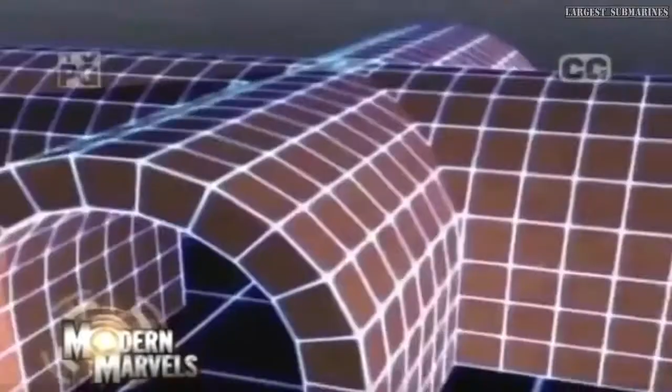A simple shape, a span across space and time, and the single most influential form in Western civilization, perfected by the ancient Romans. It spans great rivers, takes us deep into the sea, and will enable us to live on other worlds. It's the basic building block in human history, finding its way into millions of structures for millennia. Now, the Arch, on Modern Marvels.

The Arch. In its many forms, this uniquely adaptable and robust shape has dominated the Western world since its invention over 2,000 years ago. Its characteristics: able to span long stretches, carry incredible loads, and withstand the ravages of time, all while being composed of the simplest materials, make it the most enduring building form known to man.

The idea behind an arch is that it channels the force that the structure needs to support in a way that is most efficient in terms of the way it uses the material. No other shape comes close to the arch and its relatives, the vault, cylinder, and dome, for efficiency. But there was a time when such structures were unknown.

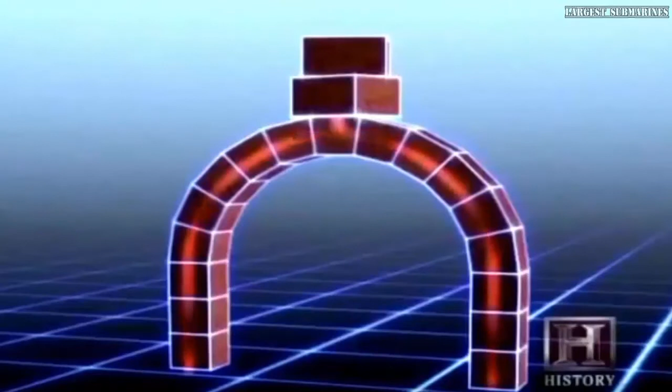As we move supports around, the arch can adjust to these different movements and can adapt with new internal forces. And the key really, or the magic, is that they can carry so many different possible loadings. And as the ground moves, the arch quite happily adjusts to it. It's in equilibrium, it stands. We can find a line of forces through one. As long as the line of force is contained inside the structure of the arch, or terminates at the arch supports, it can stand practically forever. But if the line of force moves outside the arch because of increased loads or changes in shape, it will fail.

The Romans understood this. It's a tribute to the fact that the Roman engineers knew about how their structures could redistribute forces even after they become damaged.

Arches come in all sizes, shapes, and styles. The classic Romanesque arch is a semicircle, built of stone or concrete. The Gothic arch from the 12th to 15th centuries has a pointed crown, allowing for more open spaces. Other arches include the basket handle arch, popular in Britain, which allowed a very broad opening.

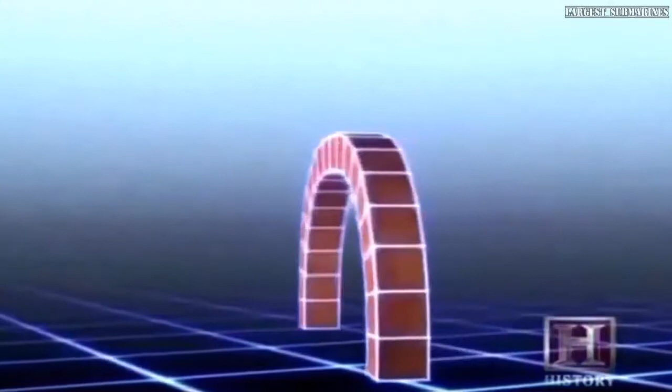And in the East, overextended or Moorish arches appeared, with less structurally sound but unique-looking forms. Although an arch's primary purpose is to support a load, its shape invited artistic innovations. As arch design progressed, the use of stone became a highly refined craft. The placement of stones, and especially the keystone, became a personal statement of the designer.

A keystone is the last stone placed in a traditional arch. It's the stone that locks the arch into place. Keystones were traditionally made larger and more important looking than the other voussoirs or arch stones. But surprisingly, this was largely a cosmetic choice.

You hear a lot of talk about the keystone in an arch being this most critical piece, this most special piece. The keystone has the smallest amount of force, yet it gets all of this attention. It's kind of a paradox. You'd expect to have more force at the middle, but the smallest force is at the middle. And therefore, a keystone does not actually carry very much force.

If you have an odd number of voussoirs, they're called the pieces of an arch, then there is an odd one in the middle, which is the keystone. If, however, you make the arch out of an even number, then there is no keystone. But being the last stone in the arch, the keystone does have one very special purpose. Without it, the arch will fall down.

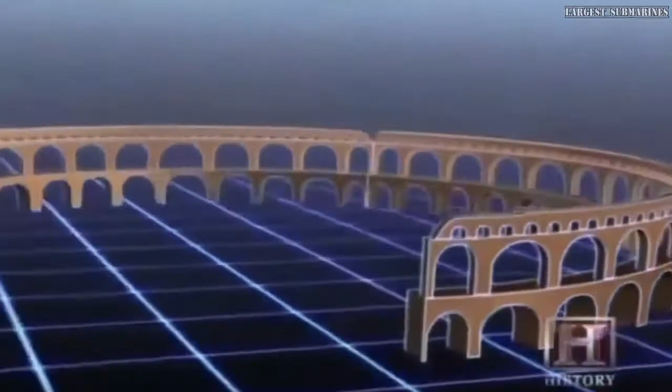These astounding structures were a stunning testament to the ingenuity of their designers. But there was much more to come from the basic design of the aqueduct. I think of the Colosseum kind of as a Roman aqueduct that's folded onto itself to enclose space. It was the arena of the emperor and the citizens of Rome.

Over 600 feet across at its widest point and 160 feet high, the Colosseum was home to myriad events. It allowed up to 75,000 spectators to watch great gladiatorial battles in architectural splendor. The use of concrete is perhaps the most exciting aspect of Roman building technology.

The arch is a structural form. It would work with concrete or it would work with rock or masonry, but the Romans took the arch to another level. The Roman invention and use of concrete for construction led to the development of another use of the arch, the barrel vault. So instead of a single arch now, you have a room with a series of arches, and so that's three-dimensional, it's a vault.

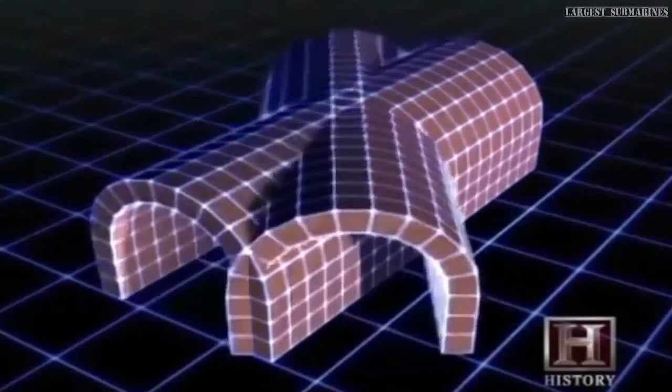But the Romans went way beyond that. They also took arches and they turned some arches 90 degrees to the first and made intersecting arches. So it's as if you took two barrel vaults and intersected them, and in the middle you have a big open area that's a groin vault. That's a clear Roman innovation.

Impressive though it is, the Colosseum was just a precursor for more remarkable structures to come. Just across Rome, the Pantheon was built in 125 AD. This innovative building would set the standard for centuries to come.

One sees structures like the Pantheon, and the most shocking, breathtaking aspect of walking into a structure like that is open space. What domes afford is interior space unencumbered by column support. The columns, of course, or the walls are on the periphery of the dome, and they're transmitting all the compression force from the dome down through the walls into the foundation.

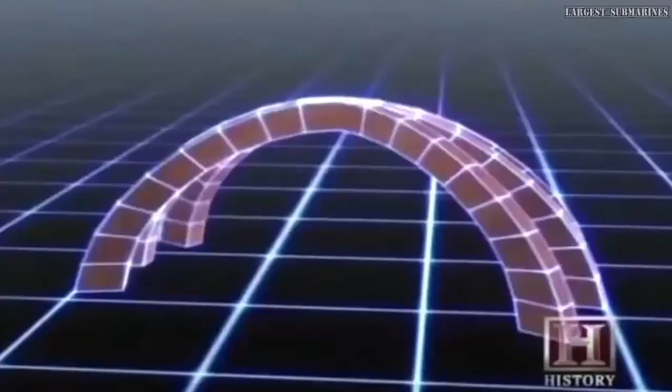The roof of the Pantheon was the world's first large dome. It was an unprecedented accomplishment. You could think of a dome as a series of arches that are all leaning on each other in the middle. But in addition to that, a dome acts as a series of hoops that surround the dome. So what prevents the dome from falling inward, there are arches in plan that are really circles that also can carry load in each ring of the dome as you build up.

The Pantheon has a traditional temple entrance, which opens to the great dome-covered interior. But there's a surprise once inside. In the exact center of the dome, there's a hole that brings in light. So you have all of these arches that are leaning together to form the dome. And exactly at the center, where they all want to lean together, Roman engineers take away the material and build a hole in the middle of the dome.

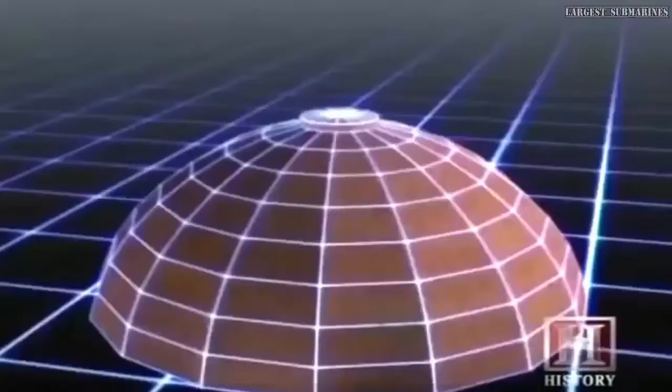The 30-foot wide hole in the dome center, called an oculus, is a huge compression ring made of stone, which in effect is a series of arches forming a circle. The horizontal forces of the dome, which keep the structure stable, converge at the top. It was a daring move by the Roman engineers. The Pantheon was an amazing achievement. But after the fall of Rome, builders would find other spectacular uses for the arch.

The Colosseum originally had 80 arches in each exterior level, totaling 240 arches above ground alone. The arch will return on Modern Marvels.

By 476 AD, the Roman Empire had fallen. Later, medieval church builders would take up the use of the arch, building primarily with stone. Concrete would not reappear for almost 1,300 years. But the designers of the Gothic era used the arch in ways the Romans could have only dreamed.

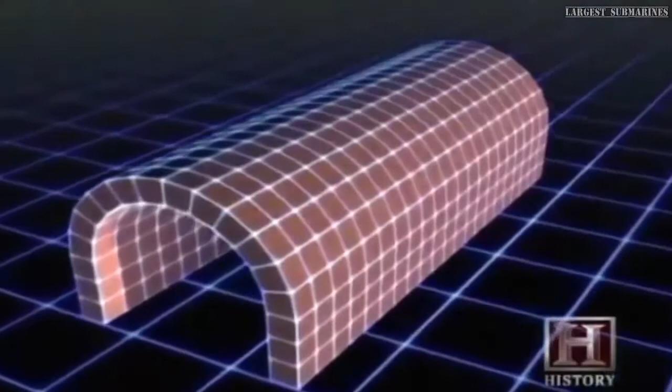The biggest advancement during the Gothic era was the getting away from the barrel-type vault and using more of an elliptical arch or a pointed arch. So from a visual perspective, it allowed the arch to be much taller. And the goal of the master builders during the Gothic era was to try to bring in as much light to the interior of the cathedrals as they could. So the taller they could make the arches relative to the width, they were able to introduce far more area of window.

The era of the Gothic cathedral also saw the use of less massive design elements. Continuing to strive for higher and grander, church builders developed new techniques to maximize their uses of the arch. Gothic cathedrals such as Notre Dame in Paris are lasting examples of the incredibly complex workmanship of the master builders of the time. Cathedral ceilings reached heights of up to 150 feet. As these arches soared ever higher, materials were used more sparingly to allow for this vertical growth, resulting in thinner walls, pillars, and vaults.

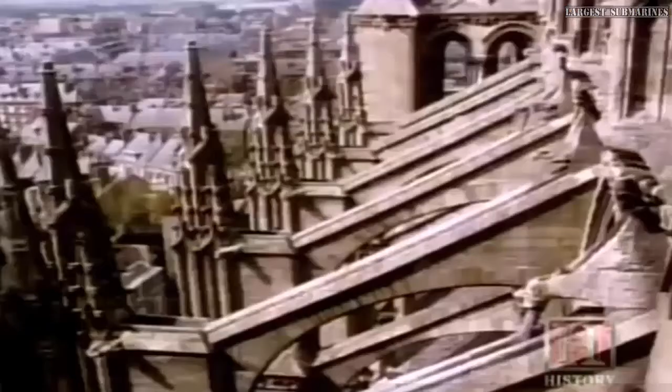But with this increase in height, intense forces were exerted by the soaring stone arches and had to go somewhere. The Gothic designers came up with an ingenious solution. You still have to get the thrust of the arch down to the ground. So how do you do that? That's the real challenge in Gothic construction. And this is where the really ingenious breakthrough comes of building flying buttresses, which are exterior, elevated half arches, really, that carry the flow of forces from the main vault down to the ground.

So as the arched ceilings grew wider and taller, the sides of the building wanted to spread. The use of flying buttresses provided a rock-solid method of reinforcement for the thin cathedral walls. You can think of it as half of a Gothic arch. So a Gothic arch with a point at the middle. If you take those two sides and separate them, they each want to lean inward. And so they can help to resist the thrust from the central nave that acts between those two flying arches.

Flying buttresses became a very reliable method of building grand structures. But this method required precision. In some buildings, such as Selby Abbey in England, arches have deformed over time due to incorrect placement of buttresses.

The flying buttress was perhaps the greatest innovation of the Gothic era. After the Gothic period, as the Renaissance bloomed, the dome re-emerged from its Roman origins to new and spectacular uses. In 1626, St. Peter's Basilica was completed just a few miles from its predecessor, the Pantheon. The new dome was 138 feet wide.

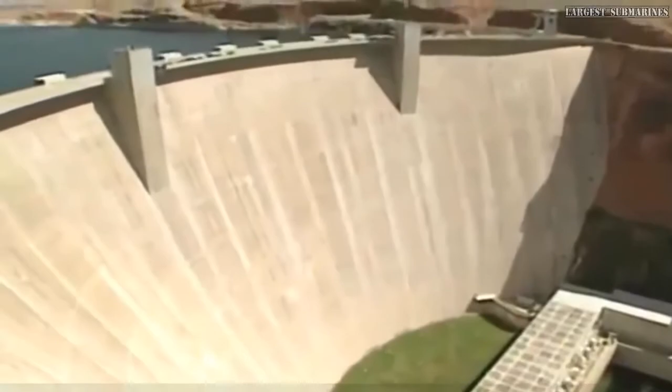The Pantheon's dome is around 20 feet thick at the base, but only a quarter of that at its top, making the dome less heavy than it appears. The concrete near the top used volcanic pumice as an aggregate, maintaining strength while reducing weight.

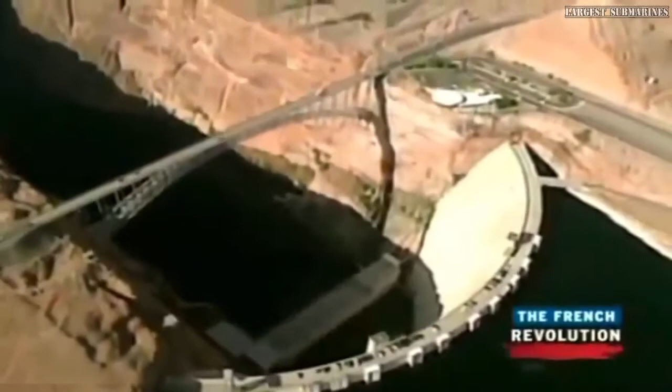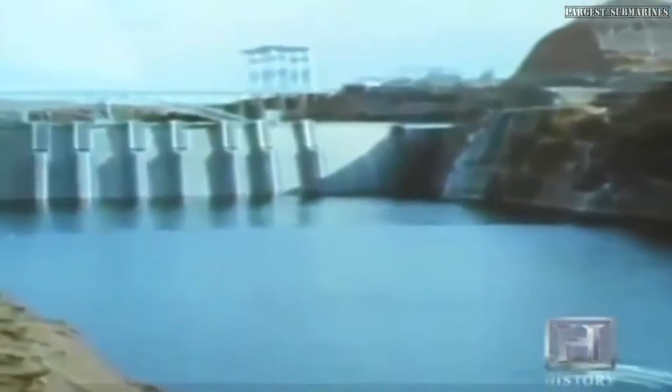The mighty Colorado River is harnessed in the American Southwest by 9 main dams. 2 of these enormous concrete structures are examples of the arch turned to a new and critical task. An arch becomes a dam when the arch is turned on its side and has the pressure of the water acting against it. In fact, many of these structures are just that, a simple arch.

Arch dams are different than other dams because of the nature by which they resist the water forces. Most dams do so by the sheer weight or gravity, and arch dams do some of that because they have mass, but they're an arch tipped on its side, and it has arch action that thrusts the loads into the abutments, which are at the end of the arch. And those loads are resisted by the rock of the canyon, and they pretty much put the rock of the canyon into compression, which makes arch dams ideal for steep canyons, V-shaped, U-shaped canyons with good strong rock on either side, which is where you'll find most arch dams.

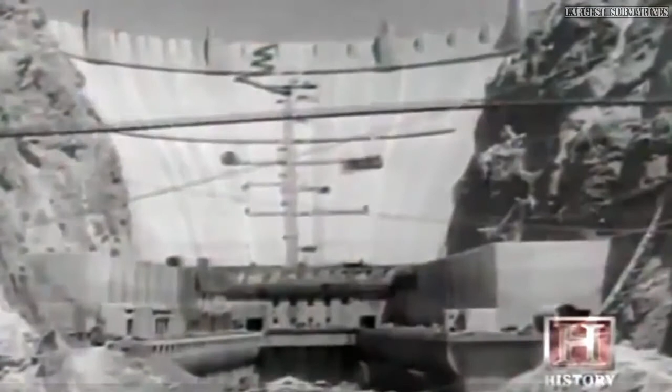726 feet tall and up to 660 feet thick at its base, Hoover Dam was the largest concrete structure of its time. It required over 4.5 million cubic yards of concrete to build the massive arch. And it withstands the pressure of 9.2 trillion gallons of water in Lake Mead.

Because the water pressure comes from the depth. It's the hydrostatic pressure that comes from the depth of water that's supported. So, in fact, supporting a lake that's only 1 foot wide provides the exact same force that a lake that would be 100 miles wide.

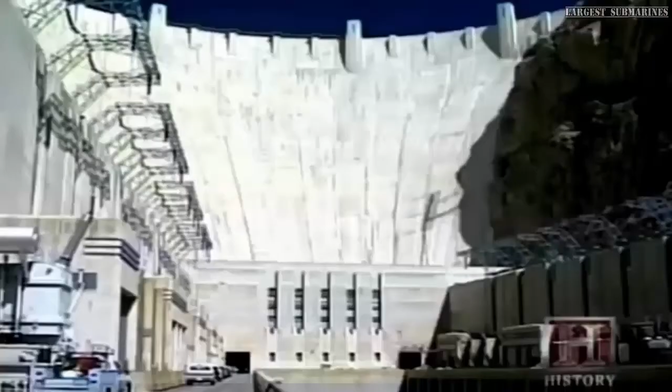As dam designs became increasingly daring, relying more upon the strength of arches, dams became thinner and more refined. One such structure resides not far from Hoover Dam. Glen Canyon is a beautiful arch. You can't deny that it's a very beautiful and magnificent engineering marvel. It's more of a thinner section. It's more of a true arch.

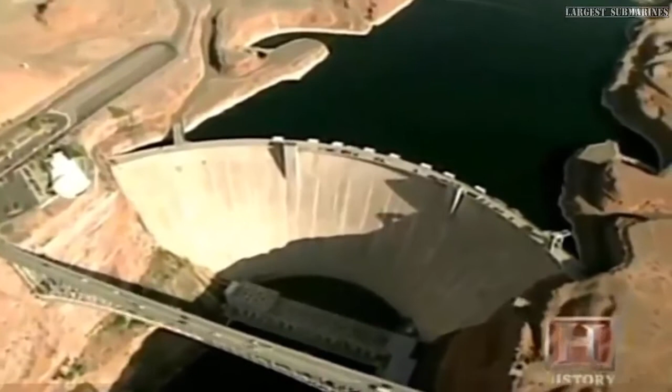With a thin concrete slab 710 feet high and 1,560 feet long at the top, the dam relies on the shape and characteristics of the arch to resist the force of the water behind it, while using a minimum of material to do so. It's 25 feet thick at the top and over 300 feet thick at its base, and is extremely strong for its relatively limited mass.

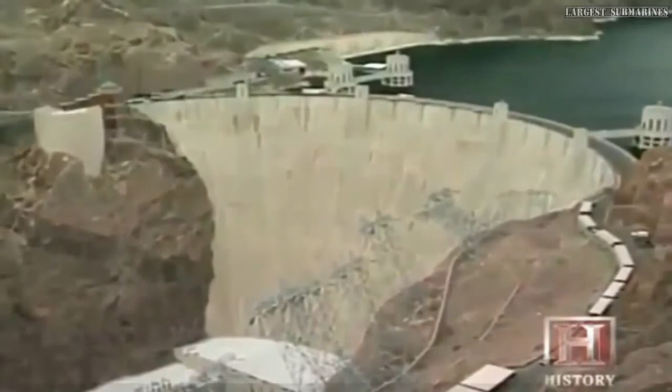The idea of the arch dam is to keep everything in compression and to minimize the bending that goes on in an arch. And if the dam can avoid tension, the enemy of any arch, and stay in compression, it can last for hundreds, perhaps thousands of years.

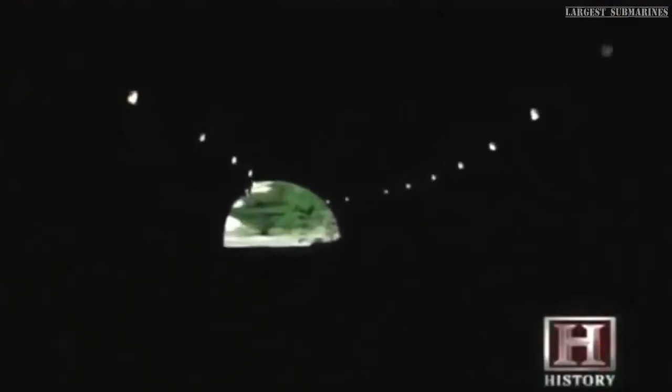Dams are clear examples of the strength of the arch. But less obvious, yet familiar to us all, are tunnels, which use the strength of the arch deep underground. Another example of arch action in which forces are redirected into compression is a tunnel. Many of us drive through tunnels on our daily commute.

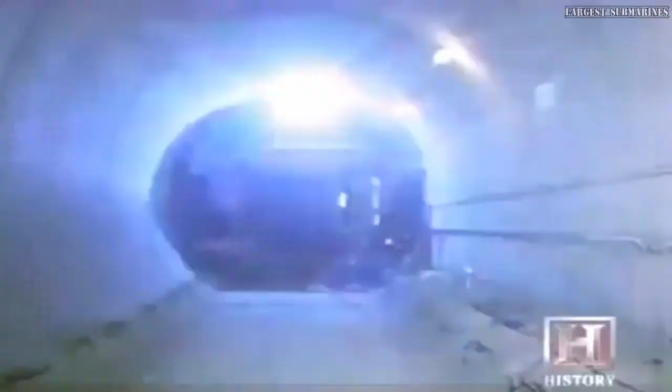You'd have to ask yourself, where does the weight of all of the soil and rock above the tunnel go? It has to get redirected. It has to go around the tunnel, and it goes around the tunnel because of arch action. While the Romans built small arch tunnels, the craft of modern tunneling really started in England in 1825, when Marc Brunel took on the great challenge of digging beneath the River Thames.

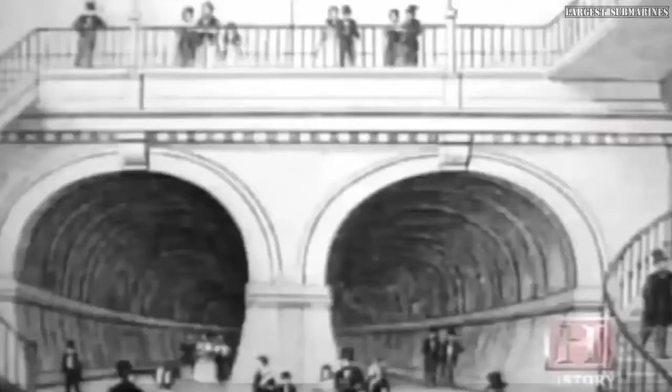In the case of Brunel's tunnel under the Thames, if he'd built just one large tunnel, one large opening, he was concerned about the loading coming from the sides failing the tunnel. And so what he did was he introduced a central pier with two kind of arches that were bearing on that central column. He was concerned about the size of the forces, so he cut the span in half by adding a central wall. Brunel's innovative tunnel paved the way for something much bigger.

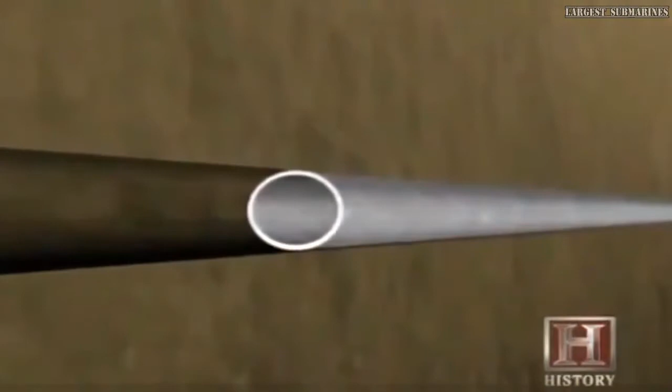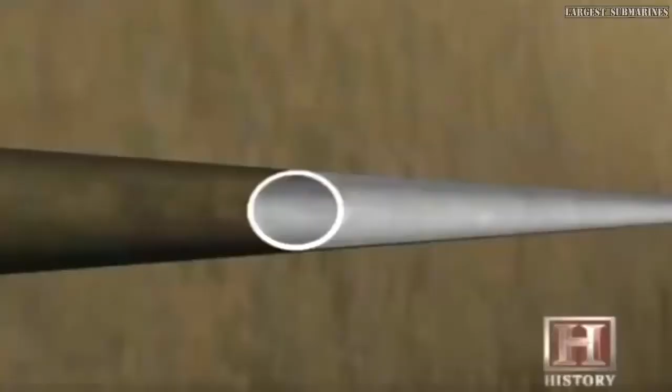These tunnels are 24 feet wide and are formed of a series of continuous arches, opposed to each other at an infinite number of points. In this application of the arch, the triple tubes are lined with a combination of concrete and iron compression rings, up to 23 inches thick. A cylindrical tunnel is an example of almost perfect compression, the best environment for an arched form.

Just as the arch provides us access under the sea, so it provides passage over the sea. Without the arch, bridge building as we know it would be impossible.

When built, the Channel Tunnel was the most expensive construction project ever conceived, with a price tag of $21 billion.

The wider the valley, the longer the bridge. And arched structures are often the best solution to that age-old question, how to get to the other side. Once again, the Romans got there first.

Visit Rome today, and it comes as a surprise to most visitors that many of the bridges in Rome are 2,000 years old. Among the most beautiful is the Ponte Fabricio, which is a wonderful example of Roman arch design. One of the first arched bridges in the world, the Ponte Fabricio allowed Roman soldiers to cross from the banks of the Tiber River to an island in its center, 200 feet away.

The Romans, being excellent engineers and innovators, discovered through accident first, and then through continued experiment, that the concept of the arch could be used to great advantage. The Ponte Fabricio was the first recorded attempt by the Romans to use an arch in a bridge. It continues to serve pedestrians in the 21st century. Since its completion, engineers have built tens of thousands of arch-supported bridges throughout the world.

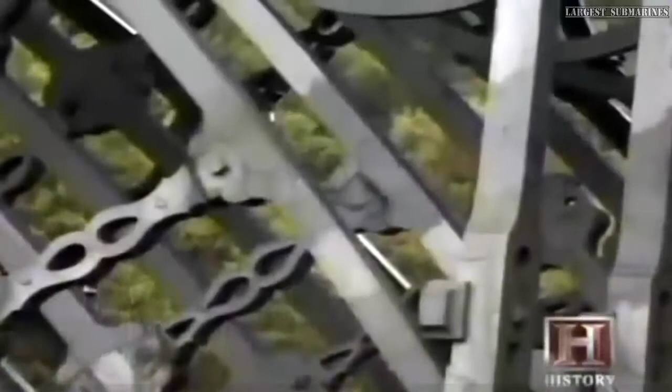In the 18th century, materials such as iron became viable for bridge construction. The Coalbrookdale Bridge in England is an example of an early cast iron structure. Completed in 1779 after only 3 months of assembly, it spanned 100 feet and was the first all-iron arched bridge. This beautiful structure was born of the Industrial Revolution and allowed for a light, airy appearance that greatly excited bridge designers worldwide.

In 1880, Gustav Eiffel, later of tower fame, began construction on one of the first metal arch bridges in France. Gustav Eiffel was a bridge engineer, and he built probably the most elegant iron arch bridge ever built, which is the Garabit Viaduct in central France. You had to have a long span, and you had to have it be stable side to side.

So the Garabit Viaduct solved this by having a beautiful crescent-shaped arch, but then Eiffel flared out the base of the arch in the same way that he flared the legs of his tower five years later in order to reduce the loading and make it more stable under the lateral wind load. Completed in 1884, the viaduct spans over 1,850 feet and stands 400 feet above the river. It would inspire many bridge builders to lend an artistic flair to their work.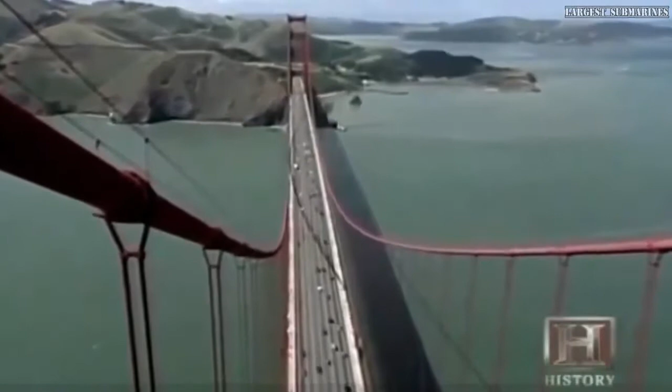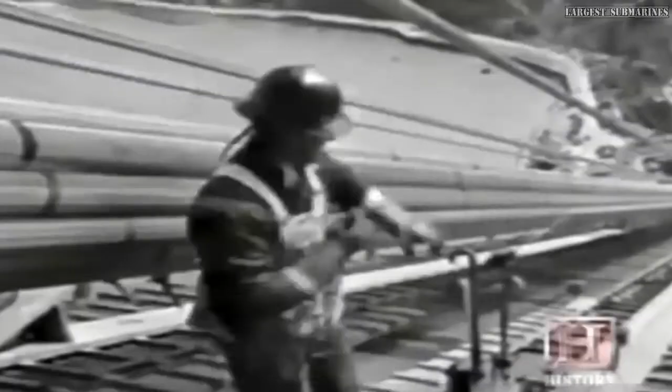The arch even finds its way into the longest bridges in the world, suspension bridges. San Francisco's Golden Gate is a classic example. The building of the Golden Gate was a landmark in civil engineering. It was completed with fewer injuries than any previous bridge construction and would span one of the most treacherous waterways in the world. By the time it was completed, the use of an inverse arch as a suspension element was well established.

A suspension bridge is exactly the opposite of an arch bridge. If we think back to the hanging chain, the loads on a suspension bridge are hanging down, suspending the roadway from a single cable or sometimes a few cables that are parabolic in shape, and they're pure tension. So if you wanted to turn a suspension bridge into an arch bridge, you would have to freeze those cables, turn them upside down, and put them under the roadway.

The roadway of a suspension bridge often has an upward camber in the middle, a slight arching effect. And that's largely aesthetic, that it somehow is more comforting to the eye to see a slight rise in the roadway. In addition to the huge cables that hold the bridge up, acting in tension, many suspension bridges are still supported in part by the traditional compression arch. On the Golden Gate's south end, a large metal arch supports the roadbed as it clears historic Fort Point.

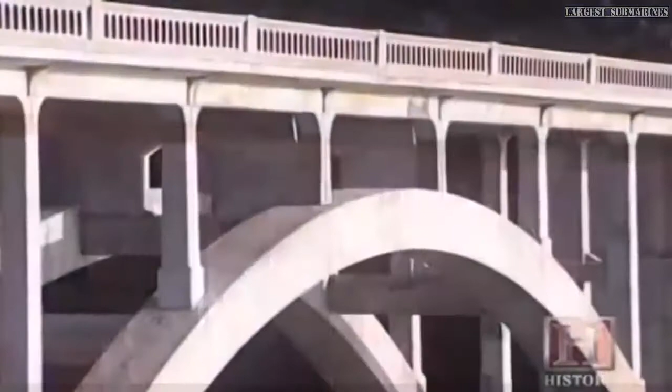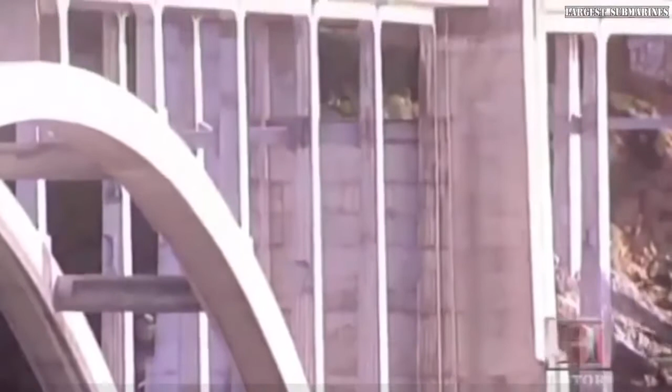Arch-supported bridges come in many forms and varieties. Some, such as the Bixby Bridge on California's Pacific Coast Highway, use just one long, shallow arch. This stunning span, completed in 1932, is 714 feet long and stands over 260 feet above the crashing waves near Big Sur. The roadbed is connected to the arch with numerous spandrel columns, or vertical braces.

Bixby Creek Bridge was built in the 1930s, and initially, when the bridge was put out to bid, the contractor had the option of constructing a steel arch as opposed to concrete arches. The thought being that the steel arches would be much easier to construct because they could be constructed from the roadway. They wouldn't be impacted by the waves or the creek down below. However, the contractor decided that it would be less expensive to construct the bridge using the concrete arch structure.

One advantage of concrete in such a bridge is its incredible strength. An arch structure is primarily a compression element. The vertical load path of the bridge will go from the T-beam deck into each of the columns, and then from the columns into the arch. The arch will then take that load and distribute it to the two towers on either side of the bridge. That's the beauty of an arch.

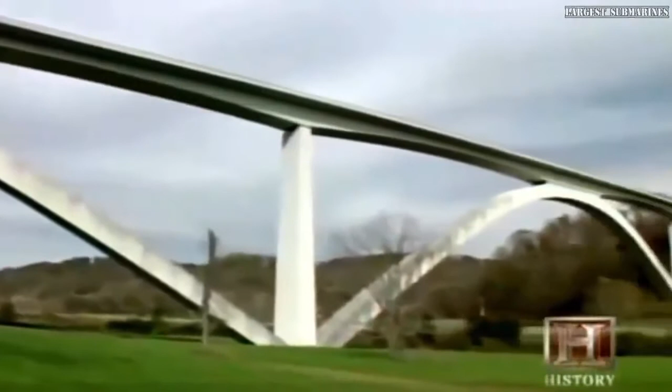Other spans have arches above the roadway, such as the Desmond Bridge in Long Beach, California. But this bridge is rapidly deteriorating and will soon be replaced with a design pioneered by the Natchez Trace Bridge in Tennessee. This bridge is the first precast concrete segmental arch bridge in the United States with 582-foot span.

The bridge is unique because traditional arch structures carry the load of the deck through a series of vertical members, which are called spandrels, that are then connected to the arch. In this case, the vision was to open up the arch and eliminate the spandrels. That way, the load of the deck is all carried at the crown of the arch.

The arch is in fact independent from the superstructure. The superstructure sits on bearings on top of the arch, and it's the load that is transmitted from the superstructure, the top deck, into the crown of the arch, which transmits that load. The Natchez Trace Bridge represents the state-of-the-art in arched bridge construction. And since its completion in 1994, it has become an emblem of modern bridge design.

In the past, arches have served us in buildings, dams, tunnels, and bridges, and they will continue to serve us in our ever-expanding future. The longest concrete and masonry arch-supported bridge in the world is the Rockville Bridge in Pennsylvania, completed in 1902. It has 48 arches in its 3,800-foot span and was built primarily by immigrant Italian stonemasons and Irish laborers. The arch will return on Modern Marvels.

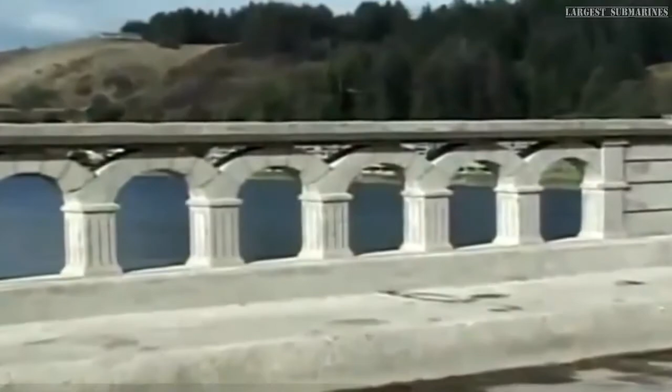Not all arches are structural. The graceful form of the arch and the dome has captivated onlookers and users for thousands of years. I think the arch is a consistent form that always recurs, regardless of material and culture. You can see it in almost every architecture in some form or another. It's very interesting to see its transformation in contemporary times into new materials and forms.

We're surrounded by arches that are primarily ornamental in function. Some are mere add-ons to contemporary architecture, while others are integral parts of an overall design. But perhaps no single contemporary structure makes a stronger statement than the Gateway Arch in St. Louis, Missouri.

Yeah, the St. Louis Arch is sort of typical in that from there you could see the way the shape of the arch is, where the loads are concentrated. If you look at it, you'll see at the very top, the apex of it is sort of a thin section because there's not too much load being accumulated there other than just the weight of that particular section.

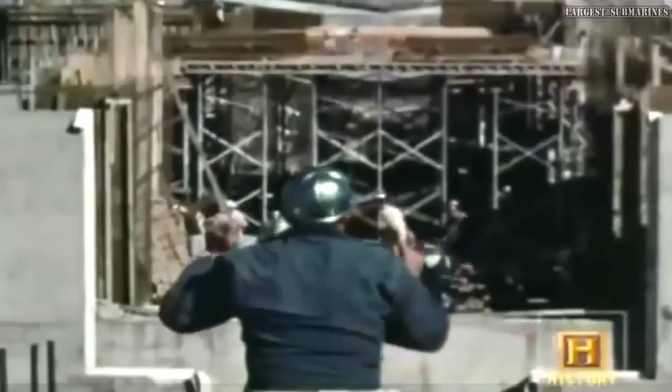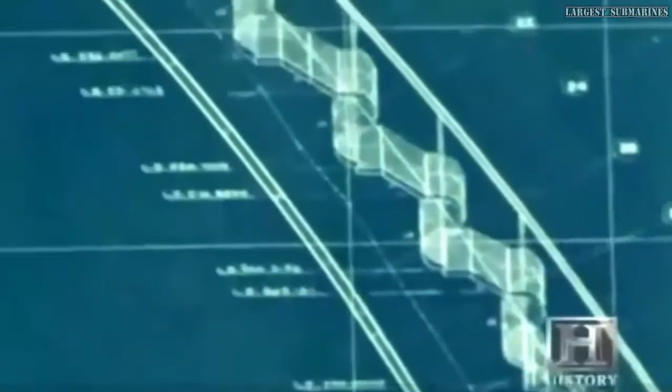Built between 1963 and 1965, the 630-foot high arch is a masterpiece of design. The legs of the arch are 54 feet wide on each axis at ground level and taper to only 17 feet at the top. The massive foundations that support it were dug 60 feet deep, 30 feet of which extend into bedrock.

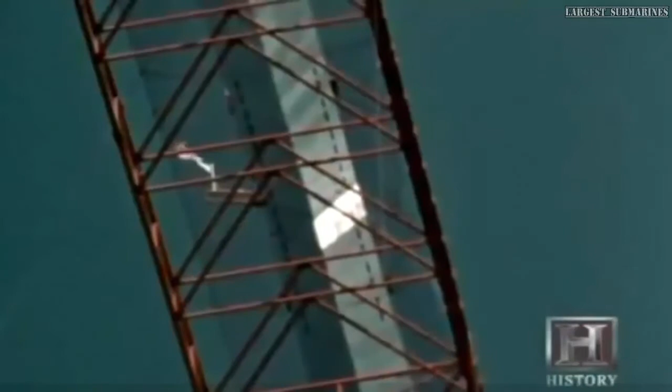The giant arch is supported largely by the outer skin, which is composed of stainless steel weighing over 900 tons. The arch was stacked out of individual metal sections. Cranes lifted each new segment toward the top until the last keystone section was placed. While the Gateway Arch must support itself vertically, it must also be able to sustain high lateral forces, such as winds. So we have to make sure we have a thick anchor where the arches end.

This giant arched form was as much an artistic statement as an engineering landmark that drew on a classical shape. I think people are drawn to arches really just because it's a familiar form, mostly. It's something that you've seen throughout history. Almost every period has an arch appearing, and it's so familiar to people, that's what makes it appealing. The St. Louis Arch is perhaps the ultimate expression of the arch as art. But the basic shapes of arches, domes, and tubes continue to serve us in a stunning diversity of ways.

Even submarines use the power of the arch to do their stealthy work. Submarines are pressure vessels that have to resist the great force of the water, particularly when you go deep underwater. The external pressure just wants to crush a submarine. And so the section of the hull, the shape of it, is a circular shape that resists this pressure in compression. So you can think of a submarine as a circular arch.

The U.S. Navy's newest submarines use this tried and true design to dive deeper and prowl farther than ever before. Modern submarines are completely cylindrical, which enables the entire structure to become an arch in compression. And they use more arches inside, in the form of braces, to withstand pressures of over 400 pounds per square inch as they dive to record depths. In addition to the cylindrical shape of the hull, each end is capped with a dome, further strengthening the vessel.

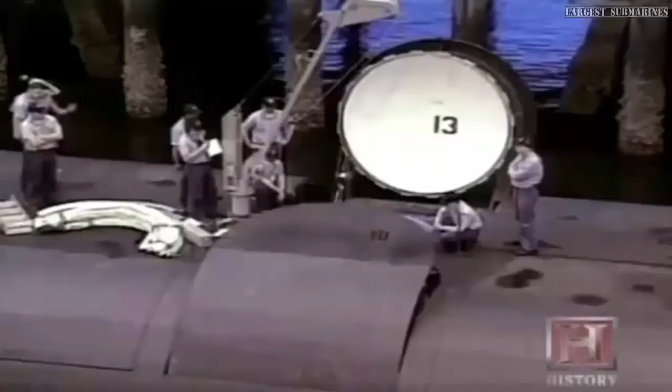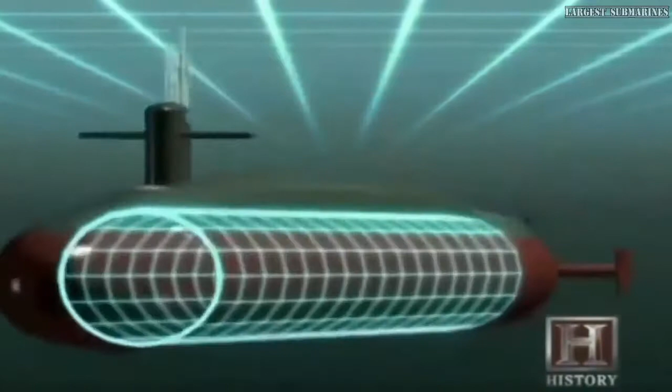Modern submarine hulls can be up to 3 inches thick, and many are able to dive below 2,000 feet. This is accomplished by augmenting the strength of the arch with exotic metal alloys. These metals must combine the ability to become compressed with a tendency to be elastic, so that the cylinder doesn't fail under the crushing pressure. So in effect, the arches used in a submarine must survive both compression and tension at the same time. These advanced technologies may lead to the colonization of Earth's final frontier, the bottom of the sea.

We talk about extreme environments. One example would be under the water, where you have the structure acting as something that resists compression, because the water is very heavy and it creates enormous forces upon the habitat where people live. So in that case, they're acting as compressive structures, and they tend to be rather thick because they have to withstand the pressure. But with modern alloys and composites, people should be able to live undersea without fear for years, even decades at a time.

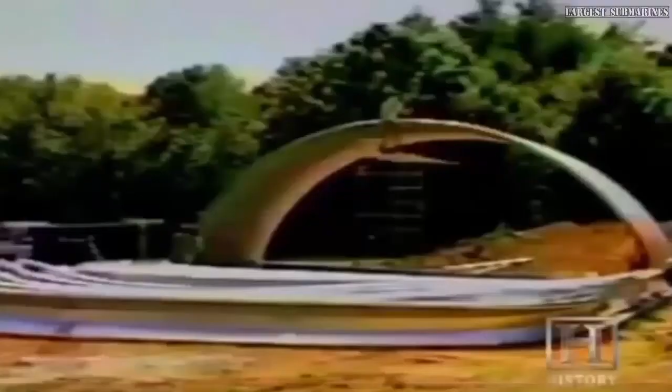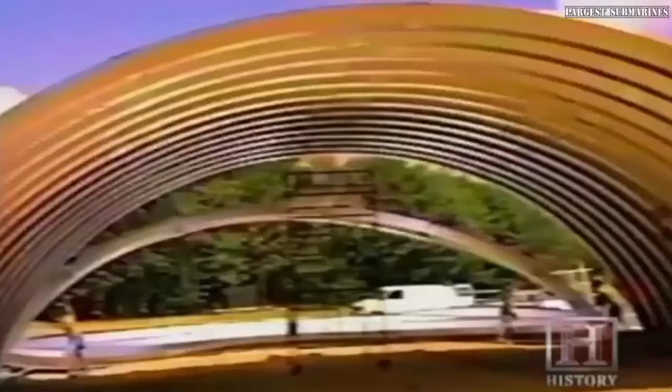On dry land, the arch has been used for years in the design of semi-permanent battlefield structures, now used in civilian life, such as Quonset huts. And all that was a big arch, elongated arch in one direction, and it was very efficient to put together very fast, and of course the military made great use of that. The Quonset hut's strength is derived not just from the arched frames, but also from the multi-arched corrugated materials used to cover them. New designs continue to evolve, using this same time-tested shape.

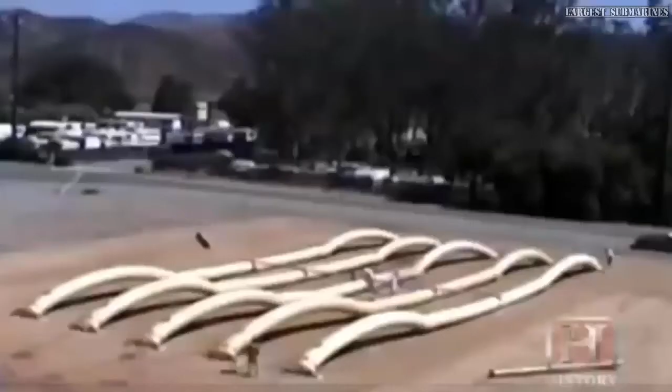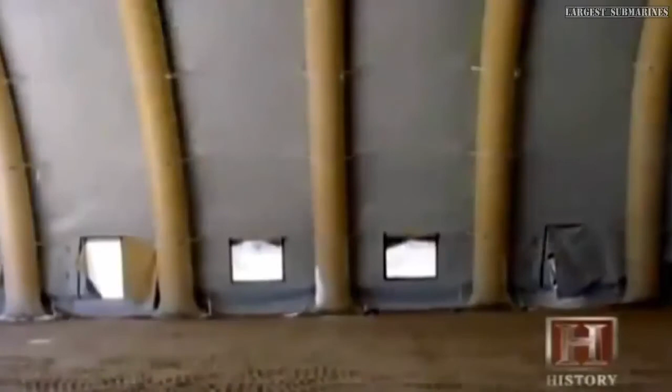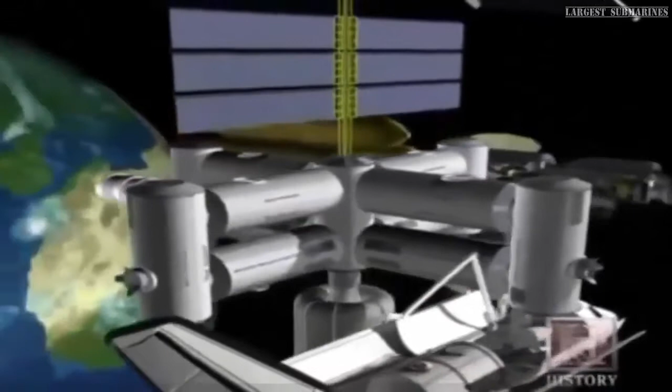In another exciting application, the U.S. Army is experimenting with a giant inflatable arch, able to lift huge loads. These arches are also used inside giant inflatable buildings and may one day replace structures such as the traditional Quonset hut because of their increased portability and ease of construction. But the strength of the arch goes beyond the confines of Earth. For anywhere gravity applies, the arch will serve as a basic element of construction.

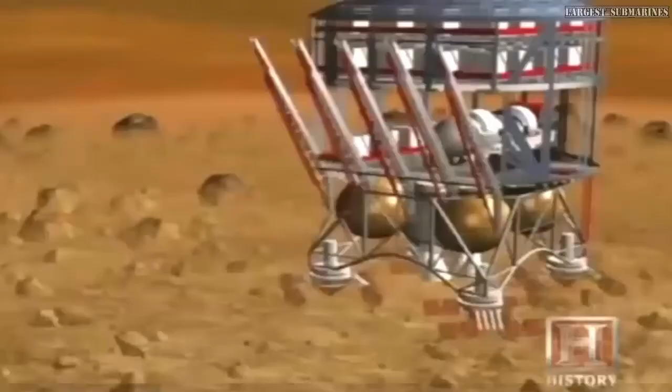On the cold, dry surface of Mars, arches, tubes, and domes may house the communities of the future. The habitat, pressurized space, have the same laws of physics governing their design. And if we look at, for example, historic arches, they assume a certain shape because of the laws of physics. The same thing happens in space. They're the same laws of physics that govern operations in space, but the conditions are often different. And over my shoulder, we have a model of one of the Mars-based scenarios that we've established that has a variety of different kinds of elements.

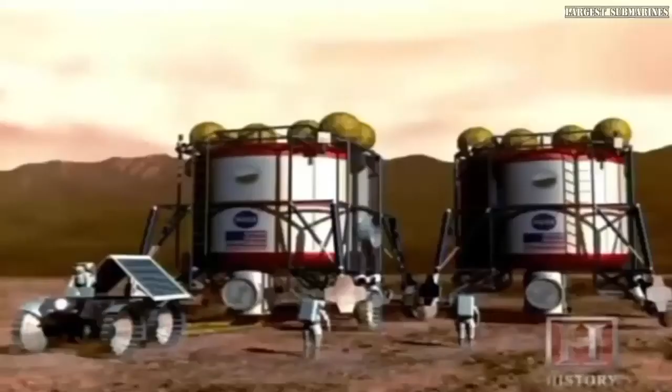Most planned lunar and Martian colonies utilize tubes and domes in their construction. Some are inflatable, while others are made of hard plastics, composites, and metal alloys. We work with geometries. Our curved shapes are usually pressure vessels. So they tend to look like cylinders, thermos bottles, those kinds of things, but they typically are all circular in section. But some of the most recent and daring plans for colonizing Mars harken back to the Roman era, using local materials for arch construction.

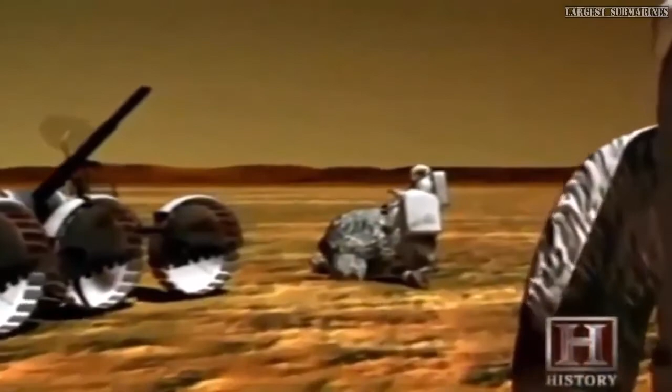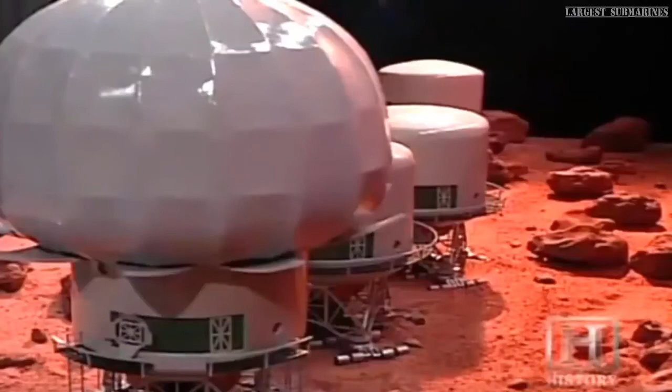Because it takes 6 to 9 months to get there, you want to use local materials on Mars in order to build. Well, what materials are available on Mars? There's essentially rock and dirt. This project developed an entire settlement on Mars, essentially a small city, made only out of arches and domes. It almost looked like an Islamic city from the Middle Ages. But it's what we consider to be the most high-tech solution to the problem of building on Mars. These structures would become, in effect, tunnels, and house these interplanetary explorers under the Martian surface.